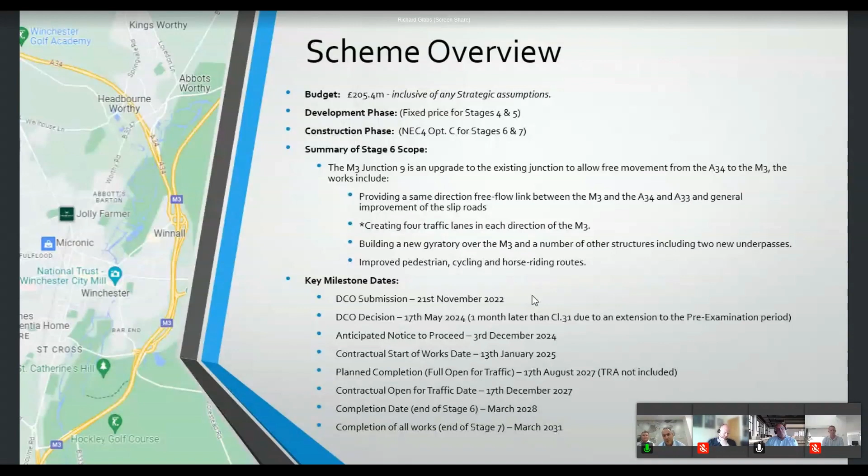The scheme is based in Winchester, on the M3 at Junction 9. The need for the scheme, and why we are there, is to construct free-flowing links from the M3 onto the A34 to facilitate the Department for Transport's expansion of the port. So we're providing free-flowing links from the M3 going northbound and southbound, and also creating 4 traffic lanes.

To facilitate that, we're constructing quite a few new structures — Richard Gibbs is going to give you some detail on that. The scheme includes a 120 meter long underpass under the M3, another underpass under the A34, and reconstruction of the gyratory bridges at the Winnall roundabout, which is at Junction 9 on the M3.

The aspiration of the scheme is also to increase biodiversity in the area, including conversion of chalk grassland and construction of new pedestrian, cycleway and horse riding facilities.

So where we are: our DCO submission went in on the 21st of November. We're expecting a decision from the Secretary of State on the 17th of May, then anticipating a notice to proceed on the 3rd of December. Our current start of works is planned for early January 2025, and we'll work to an open for traffic date of the 17th of December 2027.

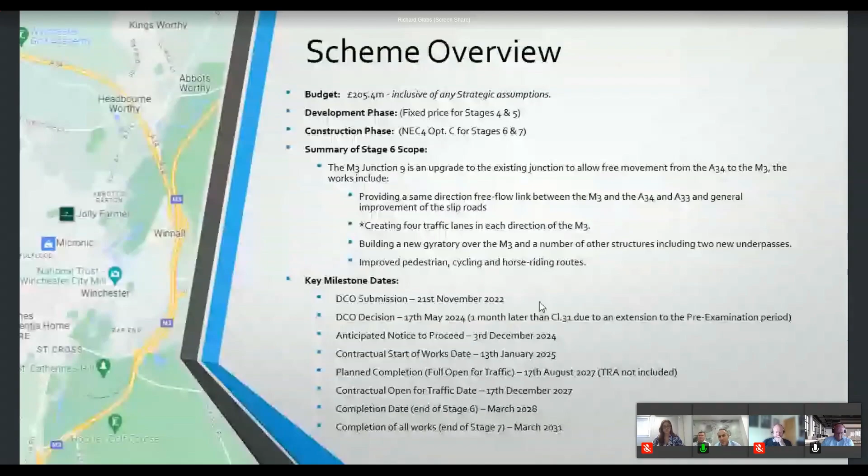So what we've done to date: we've gone through the survey period, validated the design, and now established a federated model. We're working through our DCO — examination will end in November this year, which will put us in a better position. We then move into our notice to proceed governance period, and for that we're looking to agree the TOC in an April submission.

Just before I hand over, it's also worth mentioning we're delivering an £80 million project on the M27 Junction 10, looking to start works in April next year. This is a National Highways asset conversion, but it's for Hampshire. The aspect of that job is very similar to the M3 Junction 9.

This involves mass earthworks and FRC works. We're looking at a box slide at the end of next year, November 2024. FRC works is the bigger element within that package, along with street works and drainage.

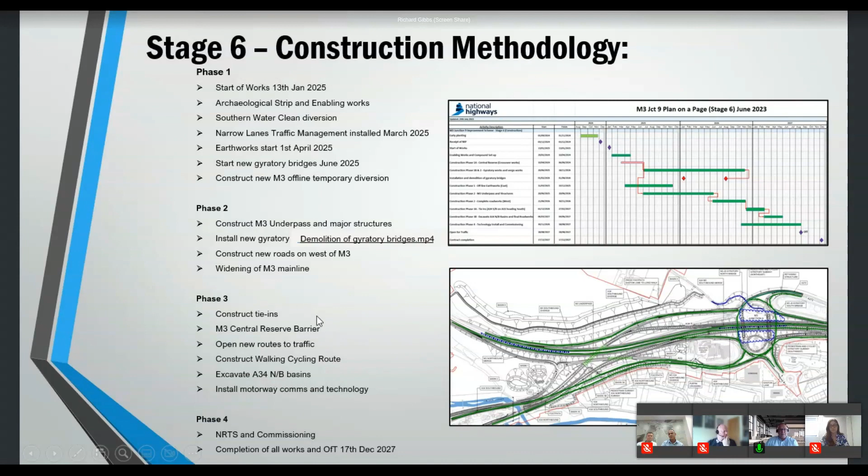That's a high-level plan of what I've just described. So, what are we looking for from the support of the team?

There's approximately 375,000 cubic meters of earthworks, cut and fill, of which we estimate 25% will require modification because it is too wet to be placed into the structural embankments. These locations are to the east of the scheme, the first phase, and this is a cut operation to the north and fill to the south, and then the gyratories open up for the new structures, east and west. The third phase is into the west side when we get into there, and the final phase is the excavation of the ponds.

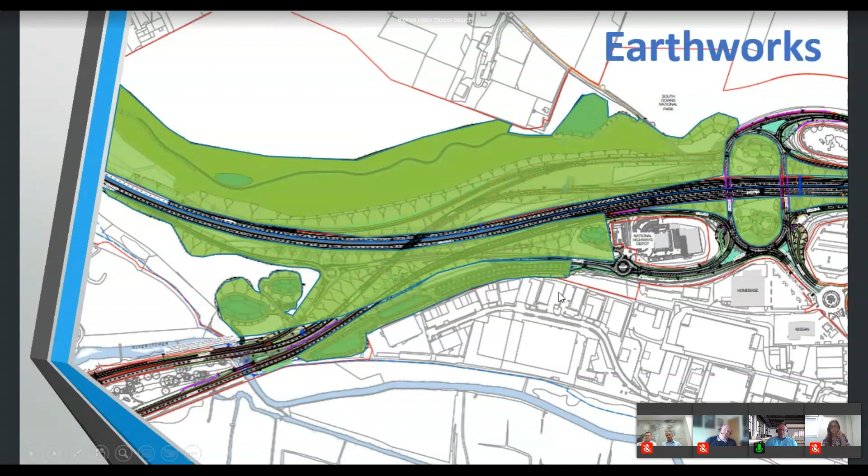Formwork, reinforcement, concrete. There's approximately 14,500 square meters of formwork, a mix of F1 and F3 finishes, which incorporates 3,350 tons of rebar and 14,000 cubic meters of concrete. These are in the gyratory abutments, the new builds, and of course the decks. The significant concrete is the M3 underpass, approximately 120 meters long and about 12 meters deep, using top-down construction. Then the A33 underpass, which ties in. So this is a very busy area of the works for the FRC.

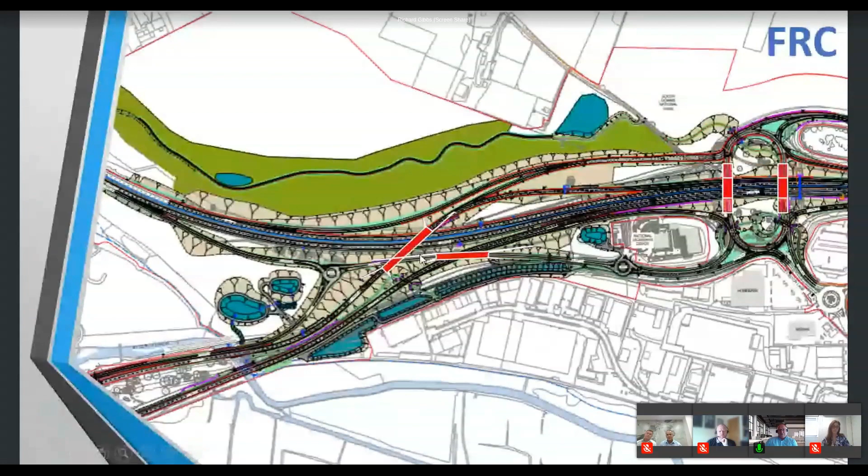We have six pairs of steel beams to form the gyratory structures, 45-meter span. One span is slightly wider, 13.5 meters to the south, to incorporate a footpath, and the span to the north is approximately 10 meters wide. This is a GA of it, slightly wider there for the footpath on one side, and 10 meters on the other. Then we have a new footpath bridge over the River Itchen, which is a walk-through truss, so we're looking for contractors to deliver that.

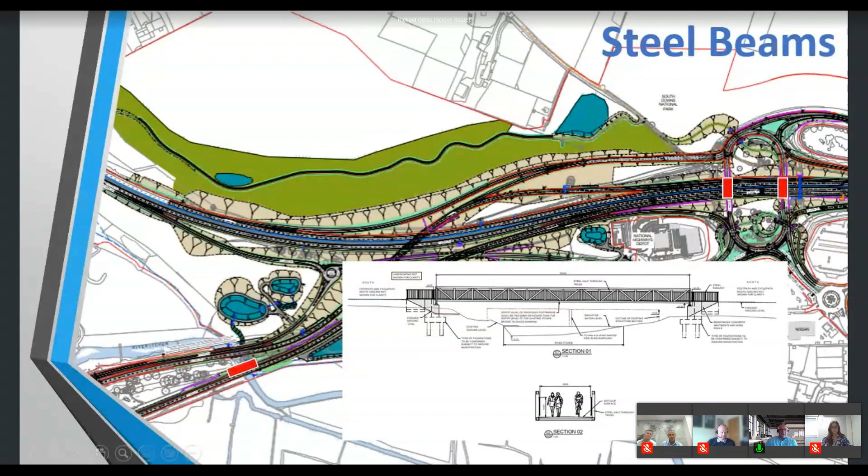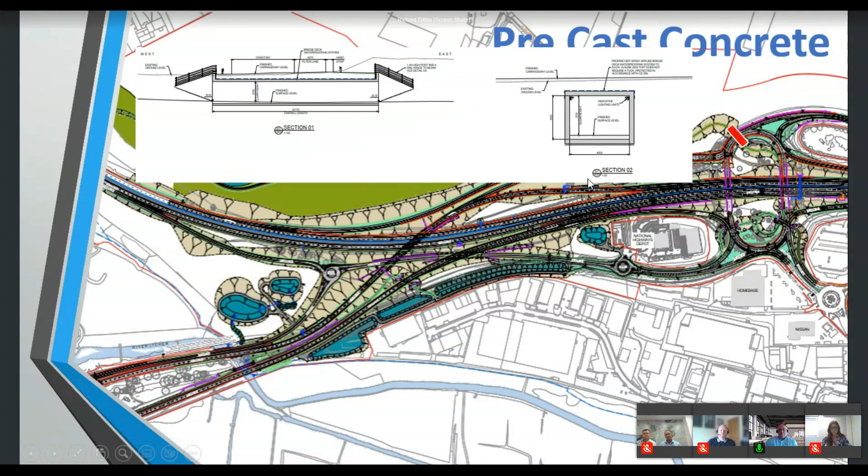There's an element of precast concrete to be provided, and these are subways around the gyratory. Because of the new alignment, we have to put new subways in, and they're all a similar type of build, 4 meters wide, 3 meters tall, with precast wing walls, around the gyratory. Then there's a fourth one which links the new link road to the industrial estate, linking Winnall to the South Downs National Park.

Finally we have around 121 meters of retaining walls. One of the runs is precast retaining walls that link into the underpass, and then in the final phase we need to put a long retaining wall here to separate the new A34 alignment.

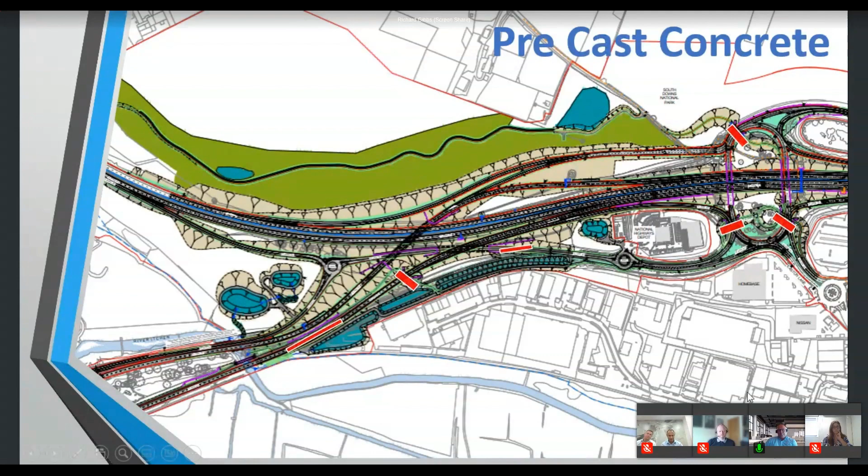There is an element of spray applied concrete within the underpasses, approximately 36,000 square meters of spray concrete, through the underpasses, the M3 again and the A33. We need to talk to people about this because there is a requirement that the first 25 meters or so need to be a finished spray applied concrete and not as-applied, so we need some guidance on that.

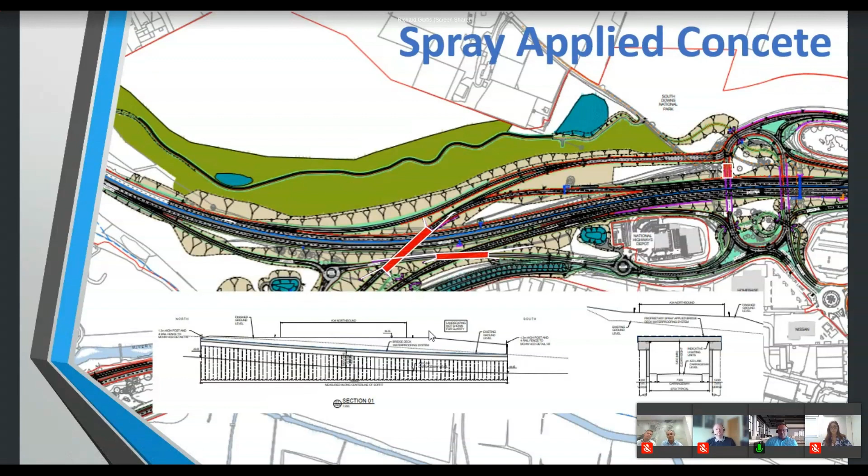Lastly, we do have sign gantries. The majority are MS4, of which there are 8 in these locations along the scheme, and then there is one super span gantry just to the south of the gyratory, which is again approximately a 45 meter span.

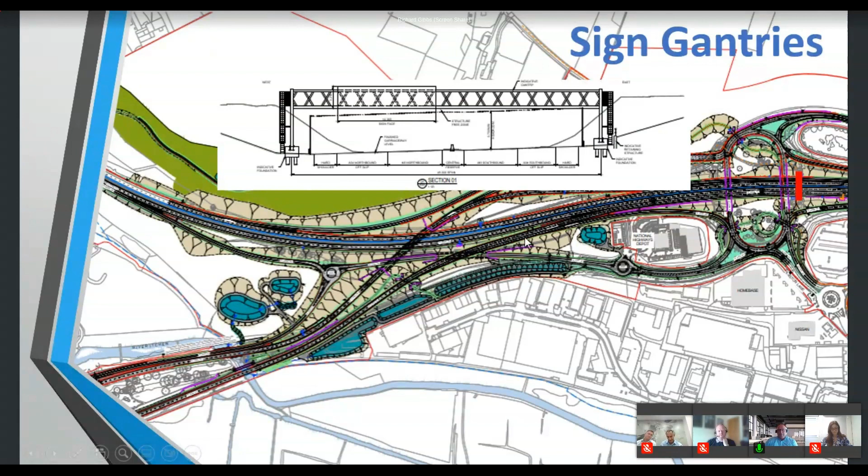In total, concrete supply including piling, we're looking for around 26,000 cubic meters of piling. The gyratory bridges are on piled foundations, as are the MS4 gantries and the superspan gantry, but the two underpasses, which are both top down, have a contiguous pile wall, so we're talking in the order of 250 linear meters of structures, so 500 linear meters of contiguous pile walls.

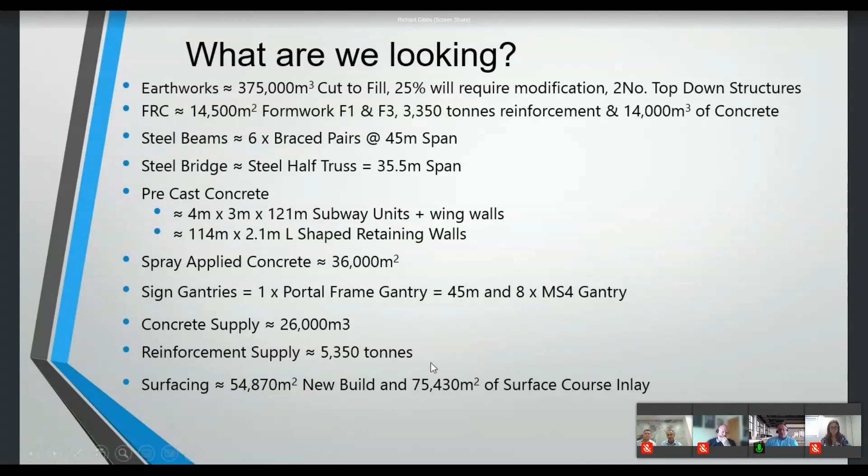With the pile cages, approximately 5,350 tons of rebar, and surfacing wise, there's nearly 55,000 square meters of new build, and then approximately 75,500 square meters of inlay, which is predominantly around the A34 and the new gyratory bridges and the side roads, and into Kingsworthy on the A33 alignment.

So that's me, and I'll hand over to James.

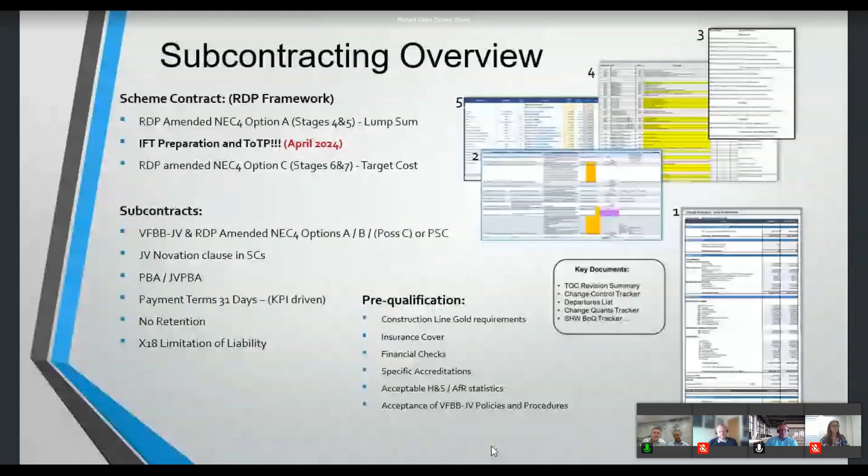Richard? Thank you. Excellent. So there are various documents that we use to inform our ToTP and our IFT document. Those range from design trackers for quantities right the way through to change correspondences, and ultimately we will be requiring subcontract involvement to help us work through this process.

So these help us focus on which packages we need to engage early, along with programme requirements, as well as where those packages and experience and competence within those packages to the delivery of that will inform our programme. And these are the reasons why we're engaging early with the supply chain, and we're very keen to have any discussions which will help us inform and build our programme in the most efficient way possible.

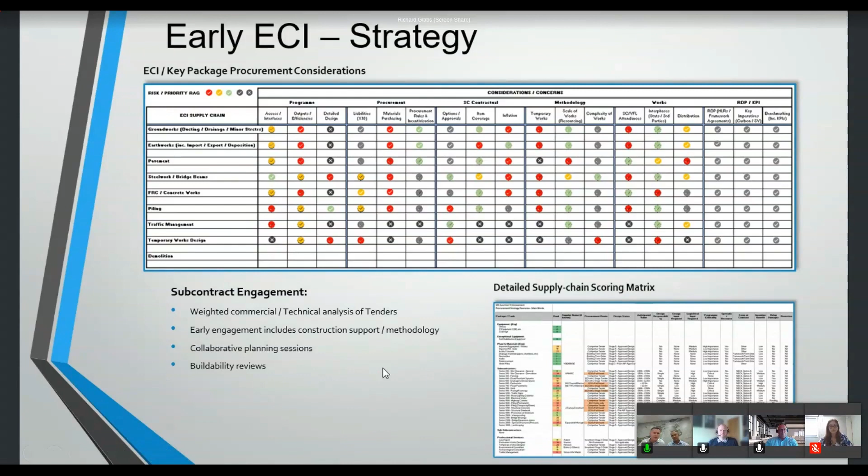I think that's it for me. We've got Lee to talk us through the procurement strategy. Thank you, James. My name's Lee Barker and I'm procurement manager for the JV.

In terms of early engagement, James has already mentioned we're looking to get people on board and engaged early, particularly for key packages like earthworks and FRC, surfacing, etc. Getting people involved early, contributing to design ideas, challenging constructability. We're going to put a big focus on that area in the coming months.

Supply chain partnerships and productivity and performance. Once we've got people on board, performance scoring and management is going to be a big part of the project. We'll look to score our suppliers on a minimum quarterly basis.

With more strategic packages we'll be looking at doing that on a monthly basis. Under tactics, we've got utilisation of Jaggaer and Construction Line. We've got a system called Jaggaer where we carry out all of our performance scoring for projects, giving us data monitoring various areas and disciplines where we can monitor performance and help generate efficiencies and increase productivity, which is a big drive for us at the moment.

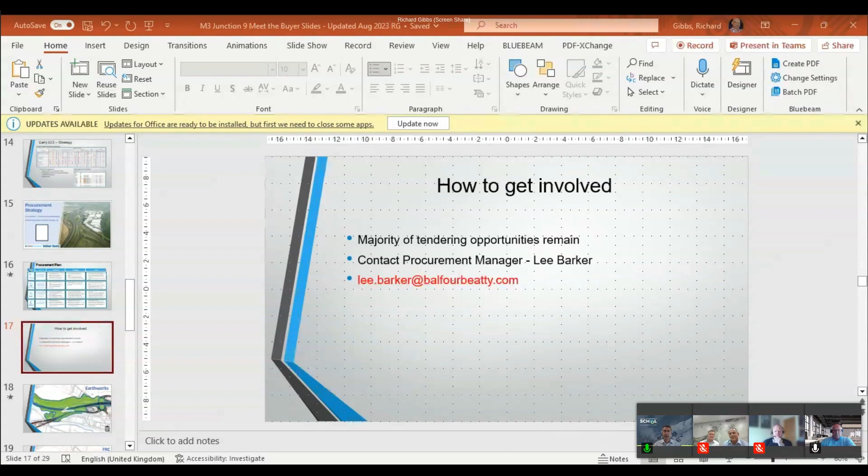Thanks for the presentation, guys, a lot of detail there to get through. Really appreciate it, and hopefully that's been really useful for the supply chain partners who are part of the call. I'm going to pass across now to Graham. We've got Gareth Scott, who's going to present details of their upcoming scheme, M25 Junction 28. I think Gareth has also been joined by Eleanor Clark, who is part of the team as well. So Gareth, I'll let you control your own slides, if that's okay, and give it a whirl and see if it works.

Yeah, okay, thanks very much, Andrew. Thanks everybody for giving me the opportunity today to chat to you guys. I'm Gareth Scott, I'm a procurement manager for Graham for their highways work. Today I would like to talk to you about M25 Junction 28, a really important scheme that we have that's currently live.

It's been live for a while, we've been on site really from March '22. So we do have a developed supply chain. A lot of our strategic packages were actually procured back in 2020, 2021, and those people have been on board with us for quite a while. But outwith that, there are still opportunities on the scheme, so we would like to tell you more about it and show you where we are.

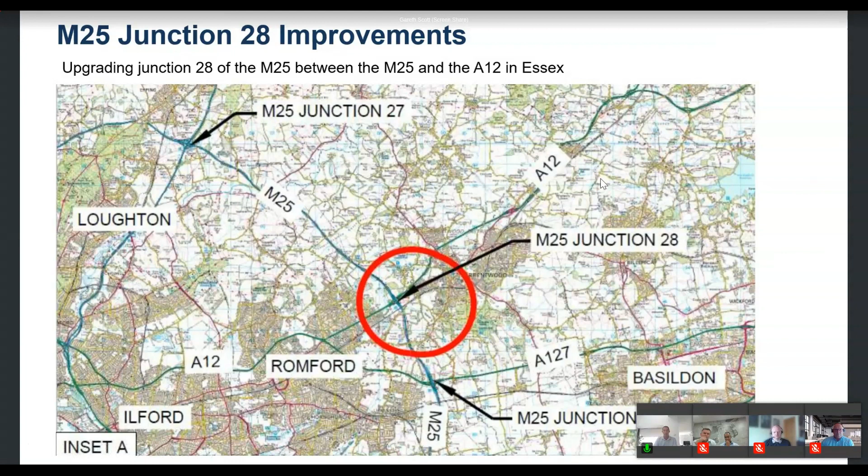Location-wise, we're at a really busy intersection between the M25 and the A12, between Brentwood and Romford. There's more detail on this map. I won't go through everything exactly here, but needless to say this is a super busy junction. At peak times of traffic, you could be talking up to 7,500 vehicles per hour, and predictions for the future are not great—we're talking an increase of around 40% by 2037.

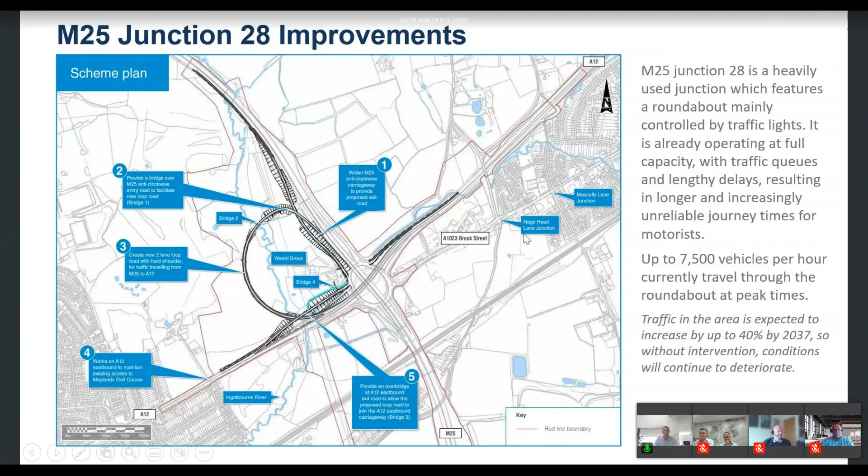So it's a very busy junction, and journey times can be inconsistent just because of the buildup of traffic. Part of our challenge is to obviously make it safer, number one, but also build capacity for this really busy junction in the southeast. As I say, we're between Brentwood and Romford, on the border of the London Borough of Havering and Brentwood Borough Council. Junction 28 is a major improvement project planned for the southeast region, connecting Essex and London, including Brentwood, Chelmsford, Colchester, and Suffolk with the rest of London.

The objectives are going to be similar for everybody you're talking to today: improving connectivity, easing congestion from a lot of vehicles at peak times, and building capacity for the future.

Some of this work involves creating a 2-lane loop road with hard shoulder for traffic travelling from the M25 northbound carriageway, anti-clockwise, onto the A12 eastbound carriageway towards Essex. Some works include construction of new bridges, taking the loop road over or under other road links at the Weald Brook, along with new signage and landscape changes.

So it's a really important major project for us at the moment. One of the big things we talked about from day one was reducing disruption to the motorist. How do we do that, and how do we reduce the construction impact on that junction?

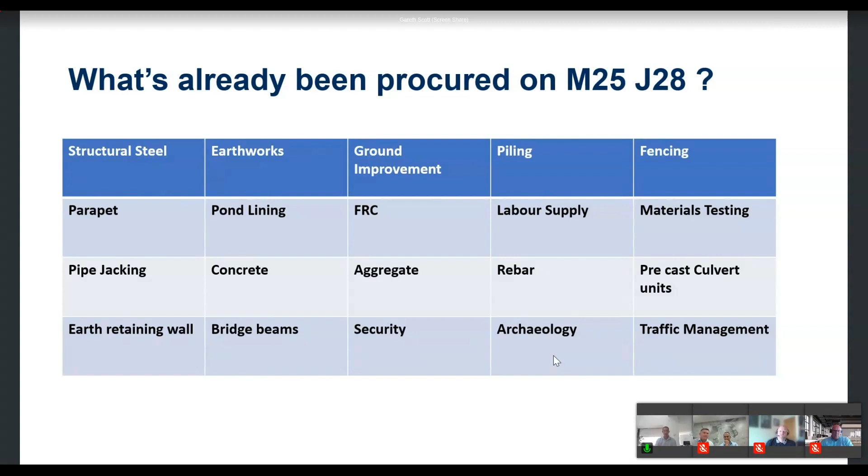But that's not to say we don't always need to talk to new people. So even though these packages are gone, there's no harm in dropping us a line anyway for future projects—that's the way we look at it.

So how do you get involved? It's myself and Eleanor who are involved in Junction 28. We're probably the best contacts if you want to get involved in that project or other projects in that region. So yes, please drop us a line—we'd like to talk to you.

As far as the procurement process goes, we've introduced some new things to Graham. We now manage our supply chain with software called Local Supply Chain. That's how you will receive your tenders, that's how you'll respond back to them, and that's how you become approved on the Graham supply chain.

We've also introduced a supplier maturity questionnaire, which is an attempt by us at the front end to assess where you are in your journey regarding things important to us—health and safety, quality, social value, carbon reduction, all the usual stuff.

We are running a two-stage procurement process where we select the top two out of a bunch from stage one. You'll be heavily weighted on quality in stage one, with stage two being more commercially focused. Our hope is that we can build a stronger supply chain and bring people on the same journey as us, focused on the things important to us at National Highways going forward.